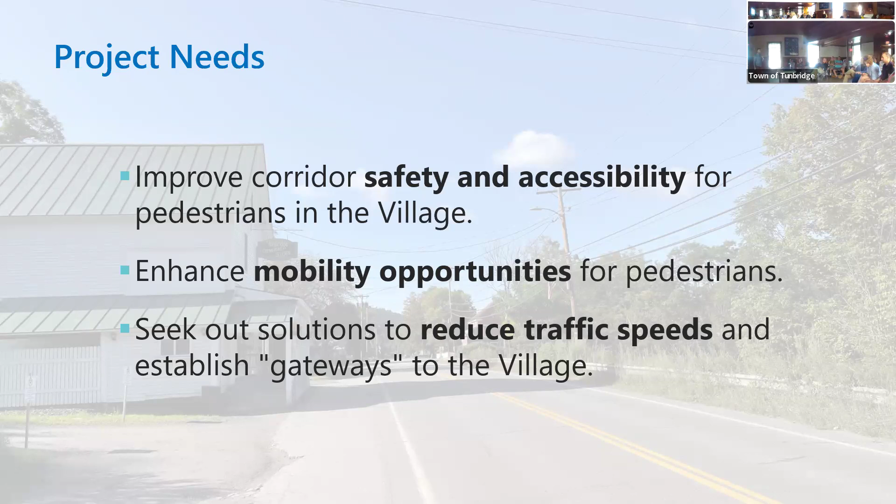So with that, a quick recap of the project area. So we're starting down here at Potash Hill Road, going up past Spring Road and then down to the bridge over the river and the connection up to Recreation Road here. Couple highlights, couple areas of interest: the Tunbridge store, the public library, the town office, access to the fairgrounds are all things that we see as destinations, opportunities for connections from this network and value add.

And before I get any further, I'm gonna quickly recap the existing conditions before I get into the alternatives. I just want to share the intention of this project as it's defined as a scoping study. So this is not even in construction, this is not we're sticking shovels in the ground tomorrow. This is what can we do to improve walking in this area?

So the ideal outcome of a study like this is to select a preferred alternative that can then, if determined by the town and the state to be viable, seek funding for the potential design and construction. The end result of this particular project that we're here talking about tonight is not a construction project. It is the hope of a selected alternative to potentially design and construct.

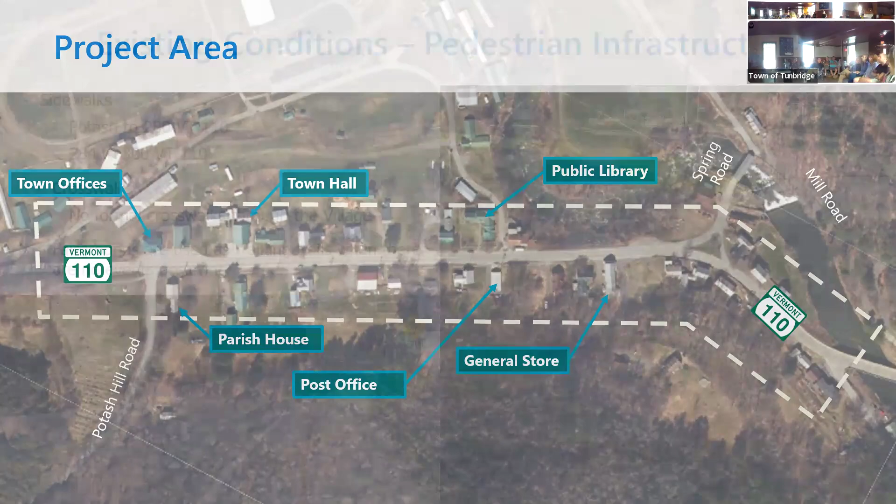So as we look at just a quick recap of the existing conditions out there, namely for existing pedestrian infrastructure, how are people currently getting around town? It could be generous to say there are existing sidewalks, they're in a bit of a state of disrepair. As Janet said, most people just choose to walk in the road, especially if you have a mobility aid device. This sidewalk right here is not traversable in a wheelchair, potentially not by a cane or walker either.

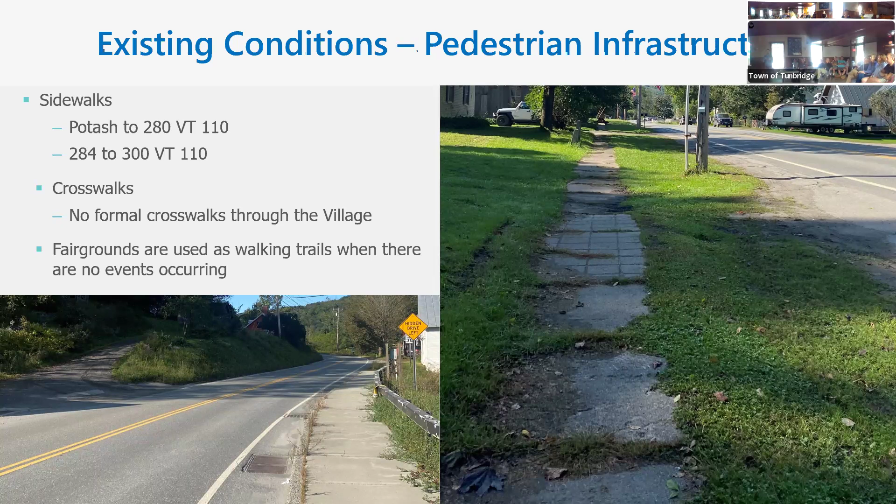If you're pushing a stroller as well, I'm not sure that's going to be terribly user friendly, but it might be a better option than pushing a stroller in traffic within 2 to 4 feet of cars that are traveling 30 miles an hour or in excess of that. So there are no formal crossings through the village either. We have destinations on different sides of the road, the food pantry, the town hall, the library, the general store, zigzagging as we go down the corridor there and where folks are trying to get, fairgrounds, of course, as well.

Another critical part of this study is going to be looking at how the corridor is utilized for parking. There's informal on-street parking along the entire project area. Obviously, this evening aside and how you all got here and parked and came in, before most folks arrived, there was still a handful of cars parked along the shoulder. So there's kind of informal allowed, permitted on-street parking. There's also a few off-street parking locations, the town offices, the church right over here, the community center, and the USPS as well. There's kind of an informal pull off.

So with that, I'm going to jump into the alternatives. Just a quick show of hands. How many folks have seen this giant, very colorful board in front of me here tonight? Excellent. It's gonna make my job a lot easier. So I'm gonna show you kind of zoomed in clippings of each of the things you've seen here and hopefully add a little bit of context to each of those. So I'm gonna step through. We have 3 alternatives. Alternative 1 and alternative 3 are very similar, with the exception that alternative 3 basically represents an extension of alternative 1.

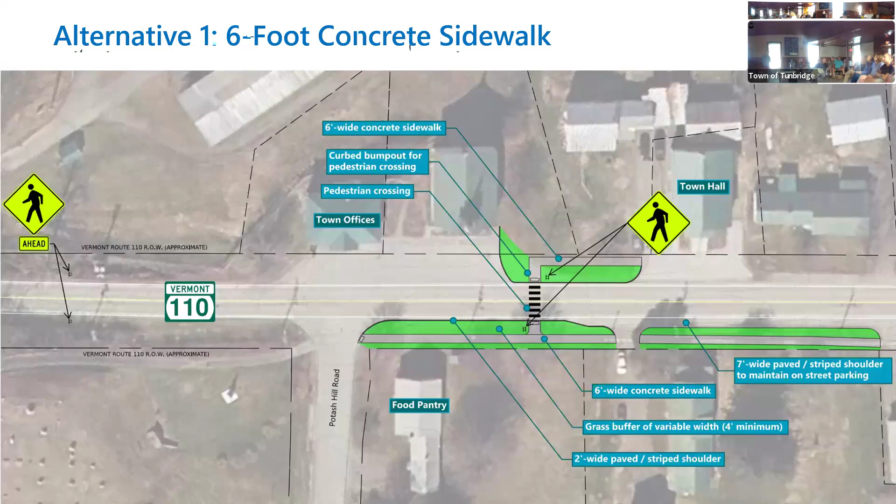So as we get into things, without further ado, again, it's wonderful that the vast majority of you all have seen this. For those that haven't, and for those that have and want a little bit more context, I'm still going to step through what we're seeing with each of these. But here's Potash Hill Road, kind of the start of our project site. And right off the bat, we have our very first proposed crosswalk, and this gets at serving a multi-purpose need. So not only does the crosswalk provide a connection between town hall and across the street to the length of sidewalk that is being conceptualized along the east side of the roadway, but it also kind of provides a gateway into the village.

So oftentimes if you're driving, especially as you come up this hill, you're in the village, the roadway changes. Obviously the buildings are really close to the road. You may or may not see someone, but you see these warning signs that are going to say pedestrians ahead, and I realize there's one right out there right now that says pedestrians next quarter mile. If we put a couple signs up that say pedestrians ahead and then potentially a crosswalk right here, what that does is kind of establish what's referred to loosely as a gateway into the village. And that says, okay, people are walking here. So the very first thing you see when you come up from the south as you come into town, big warning signs that say people are here, people are moving around.

Please be mindful of the speed limits and please be respectful of pedestrians if you see them. And so what's being proposed along the east side of the road here is a 6-foot, what would be concrete sidewalk. And in the areas of these crossings, what we've done is we've quote unquote necked down the street. And so that is kind of further encouraging speed management. So the roadway is inherently narrower here at the point of the crossing, and then it widens out to continue to allow that informal parking along the corridor.

So those are the 3 alternatives. And to summarize them quickly, we plug everything into what we call evaluation matrices, and we highlight these based on a color scale: red means no change, no real benefit. White is more of a descriptive or a null benefit, and then light green is slightly positive, darker green more positive.

So when we look at what we're considering in this, and I have three tables like this, in this case multimodal and traffic considerations, we're looking at bicycle access, pedestrian safety, and vehicle safety. And pedestrian safety, it's easy to see if we're providing continuous pedestrian facilities along the whole way, intentionally putting in crossings that have built-in countermeasures to hopefully slow traffic speeds. We see that as a blanket improvement for pedestrian safety across the board.

Vehicle safety as well, we think with the potential for the bump outs at the crossing areas, and those neck downs that would bring in some natural traffic calming, and improve conditions for drivers inherently, because hopefully folks will be going slower, and inherently improving conditions for any walkers and bikers seeking to use the

potentially new facility. And then bicycle access, we didn't hear too much of a demand for bicycling outside of the ability to utilize the existing shoulder and potentially a formalized shoulder in a selected alternative. But we did want to call out that the shared use path would provide a greater benefit to any bicyclists in the area over the concrete sidewalk.

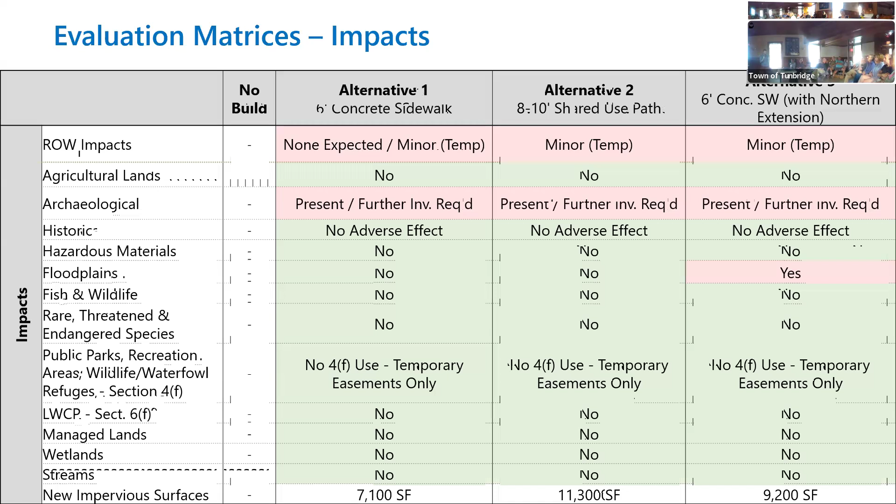So with that, I'm going to stop talking, only to answer questions. So thank you all for listening, and I welcome questions. Sorry.

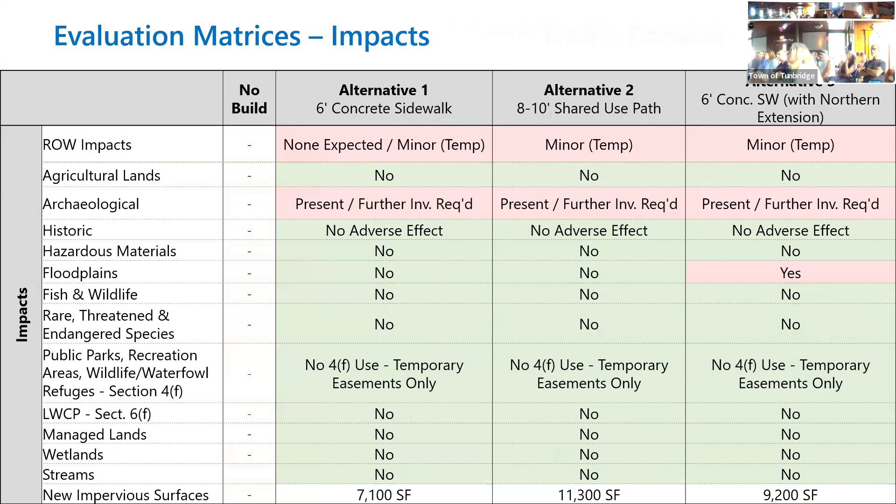While you have that screen up, alternative 3, I have a question. You had something flagged for a potential floodplain issue. Where was that? Maybe erosion. I think it's just being sensitive to the connection up here, which is at an elevation. But potentially down here, we could be within what's called the effective river corridor. So it would be constructed within that, and I don't think it's necessarily a concern. It's more of a permitting thing we want to make sure we check off.

It does concern me because I own that area where the cars park across the street from the store. But 30 from the center line, so this line right here. Anything in between here and here is owned by the state. Even where that sidewalk is now, there's nothing underneath that. And this parking lot, there's nothing out there. I've been out there today clearing the brush. Where you have that sidewalk right now, nothing. That washed out.

Oh, yeah. What we're going off of when we laid this out is statewide contours, so the drops are not shown where you see that red dot according to that information. But it could be worth looking into a little further if we're looking at something down there, a place where there's been erosion problems during flooding, even though it's so high.

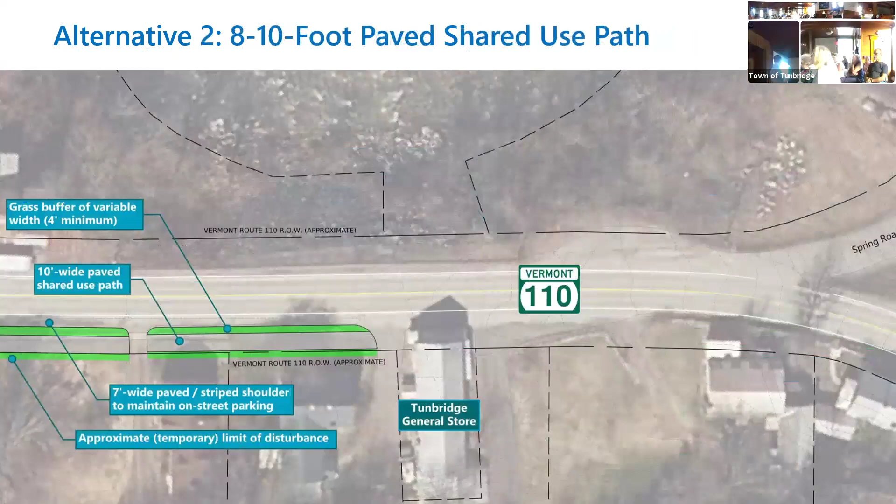Sir. So, yeah, it's interesting to have this south end slide back, and I want to hear your comments about the safety here, which is often just not seen and not addressed. And it does seem to me like the most comprehensive, forward-thinking approach is to protect the whole village from end to end in terms of speed and protect people that are walking.

I guess I'm saying I support this kind of concept being extended to the south end, to that next access to the fairgrounds, and having some sort of crossing choke point there. Actually, it might not be a crossing. I understand the issues with potential encroachment and the concern for that, but if there are places where there's effectively already that space allowed for, it seems like it's worth looking at.

So if you treat the whole village from that access point to the fairgrounds, all the way to the bridge on the north side, that seems to me like a really promising, long-term solution. Sounds like we need alternative 4.

Continuing with that conflict, is it possible to fill some of the bank on the cemetery side? No. Have you walked down there and looked at it? Yeah. There's an embankment on the fair side. So you take out the bank. You're talking past what this is already. That's even option one, right? Option one only goes so far south. The big concern is, especially with the fair, people trying to get up and down the hill.

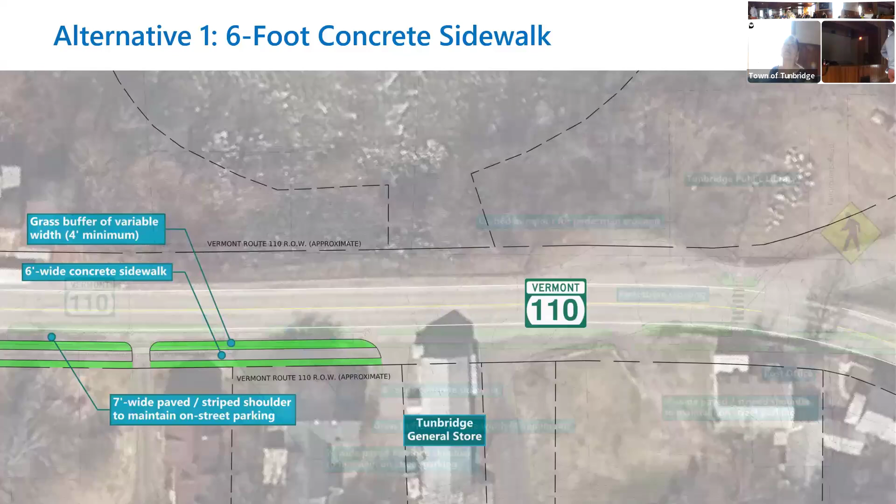I think your hand was up, sir. So alternative two, we haven't talked about that. I don't think a wider shared use section there is really necessary. I agree that the speed needs to be reduced, but most cyclists that come through town are fine riding in the main lane, probably going about the speed cars should be going, 15 to 20 miles per hour. Bicycles don't need to be on the sidewalk with pedestrians. Okay, thank you.

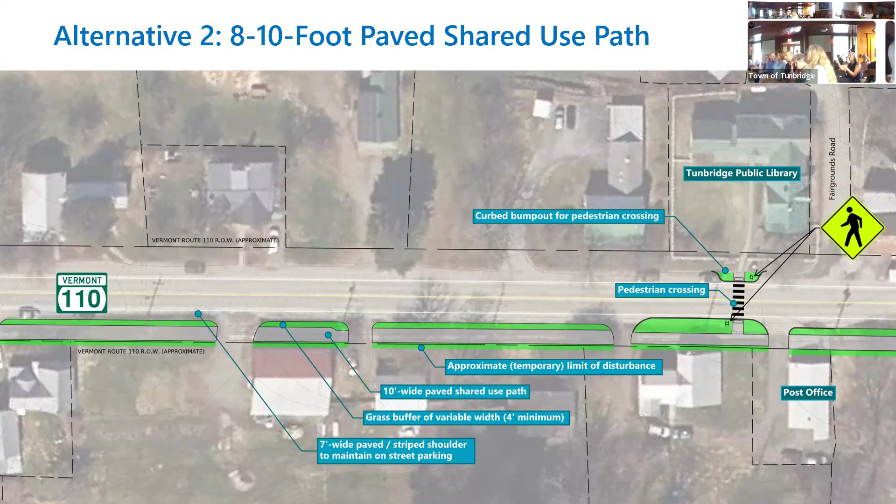I was just wondering if you can tell me, with a 6-foot sidewalk that would be there, will the edge of this be where the existing sidewalk is now, or will it be taking out more of people's property? I know you spoke about a distance from the center line of the road, which I assume is probably the edge of where the existing sidewalk is now. They did it the right distance, right? The road is a lot narrower. Yeah, potentially. I can't answer that with confidence now, but I would think potentially.

That land would be taken from owners with a new sidewalk, another 3 feet or something like that? I think the state would seek to do the project within their right of way. And again, if there would be any impacts, I don't think the state would seek to build the sidewalk on private property without a right of way process. The state always tries to avoid that where it's feasible.

These drawings are obviously based off of GIS information, which is geographic information system. It's what the state has, what's available. It's accurate to about 1 to 2 feet. But we're pretty confident that we could build in a sidewalk, maintain parking, and still include enough separation from parking to not impact, even in a temporary sense, any private property. This grass belt is obviously also very wide. If we needed to potentially shift it to mitigate even the temporary impact, then I think that could be an option, but that's all future design consideration.

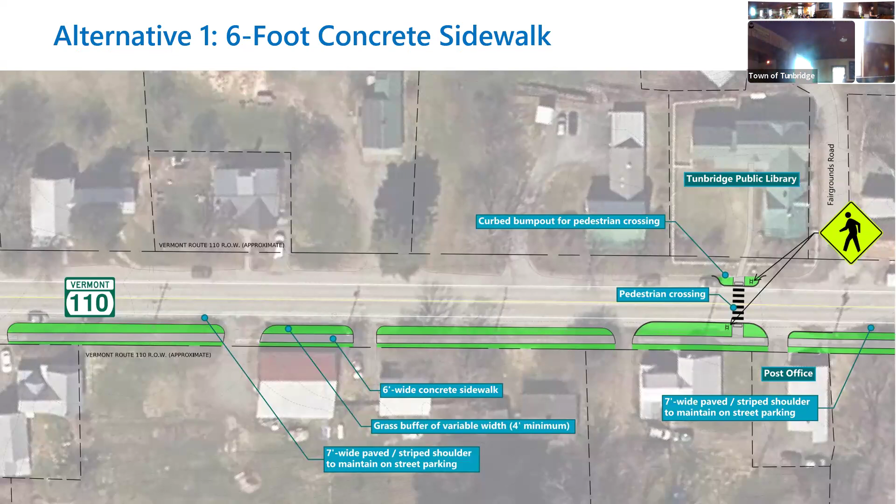Anybody else? We've been in here for about an hour and a half, so let me send people to their evenings. Any other questions or comments? The straw poll, the unofficial straw poll. One final comment or question: if we do nothing more, where do you go from there? Oh, I'm getting there, I'm not gonna spoil it for you.

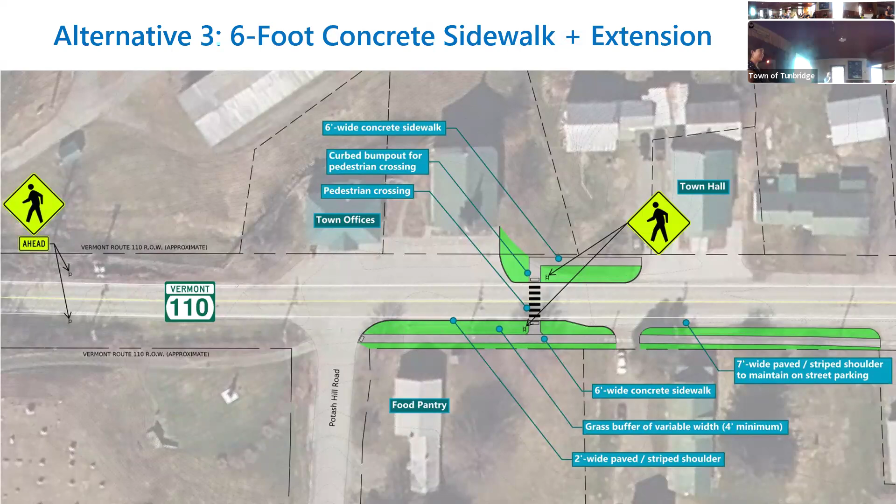So I think it would benefit us just to take kind of a straw poll. Would anybody raise their hand for alternative 2? Not favorable. So we're gonna take an unofficial straw poll on no build, alternative 1, alternative 2, or alternative 3. I'm guessing there's going to be 0 votes; I'm not detecting much of a need for a wider facility here. So if you would vote for no build, no change in your community, no sidewalks, no nothing, please raise your hand.

All right. Those of you that will vote for alternative one, which again is the concrete sidewalk from Potash Hill to the general store.

And alternative three, which is alternative one plus the extension to the north. Thank you. Thank you. All right, so. Told you I wasn't gonna spoil it.

Next steps. We're gonna take what we heard here tonight. We are going to work with the project team to arrive at a preferred alternative between those four options: no build, alternative one, alternative two, and alternative three. Something tells me it's not gonna be alternative two. And then from there, we're going to start building our draft report. And so this is basically the final submission.

So the final submission material for this project is all of our findings from our outreach and engagement with you all, our investigation into the existing conditions of the site, our development of the alternatives, and our investigation into the potential impacts of those alternatives, permitting requirements, cost estimating, all of that.